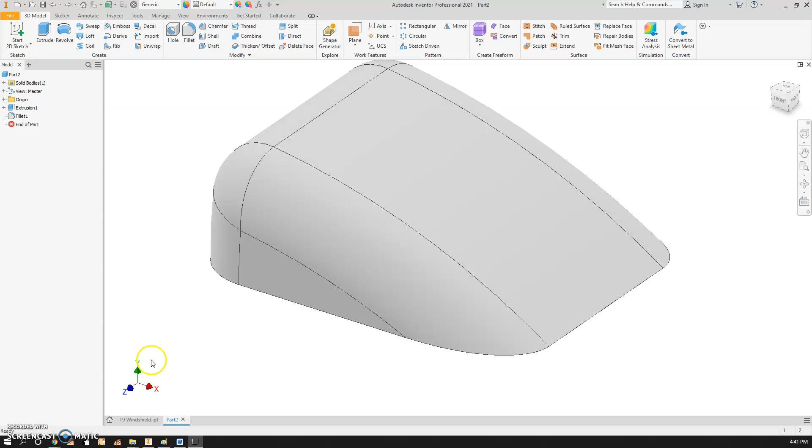Okay, part 2 of 2 or 3 or more. We need to shell this out. Then we need to add this bottom section, shell it out after filleting the corners here, add these little pegs here so it fits into the vehicle.

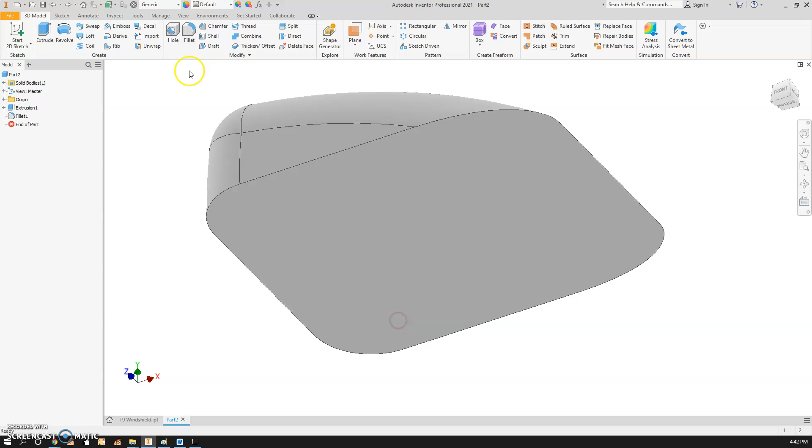So I'm going to hold shift and middle mouse, flip it over, and hit the shell button, which sometimes acts up like it just did, so I had to start over, and I said some certain words that I won't repeat here. Click on the bottom. This is supposed to be 0.07 according to our drawings. So that's what that looks like.

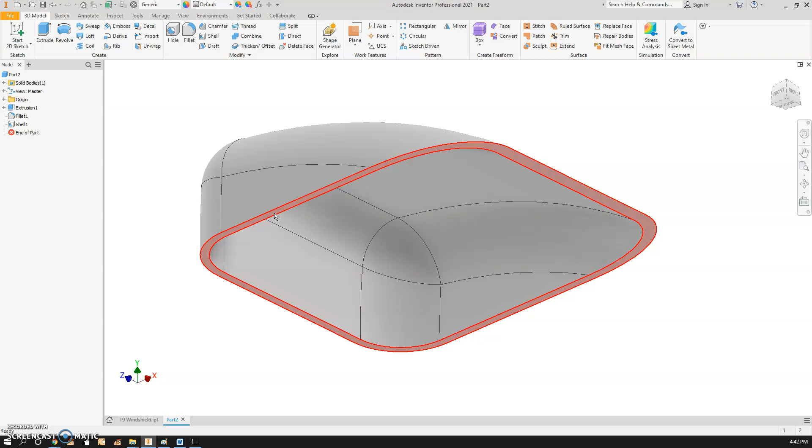Now I want to draw that part that sticks out. I could do it in 2 extrusions, both starting from this plane, go up into it, and then down. But I'm going to do it in 1 because that's better. So I'm going to use a plane, offset from this plane. It says it's 0.67 down.

I'm going to draw my sketch down here. I'm going to orient it just like it is in my drawings, which I have it right now. And I'm going to use the same numbers that they use, so I don't have to do any math.

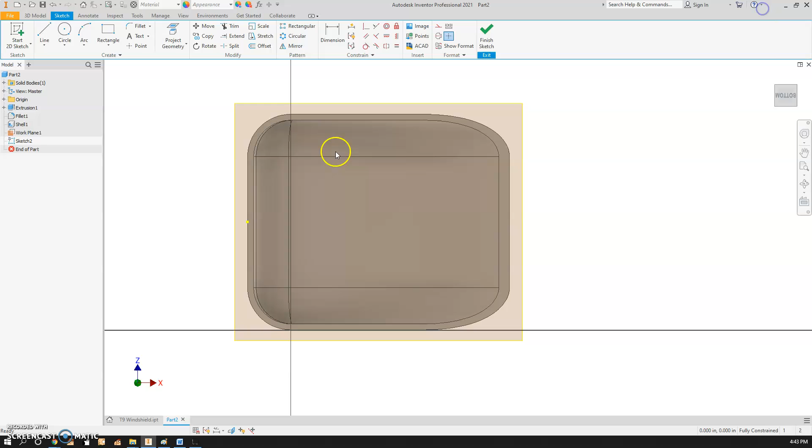So I'm going to draw a rectangle. I'm going to try to avoid any ant trails, any clicking on anything. I'm going to draw a rectangle like this. And I'm going to start dimensioning it.

This from the front is 2.22. This to the front of the windshield is... wait, this is the back of the windshield. That's the front of the windshield. 0.68.

This to here, this is all datum dimensioned. The bottom and right, 0.29. And then this side, hopefully making it halfway, even though going only to the hundredths on their drawings doesn't help.

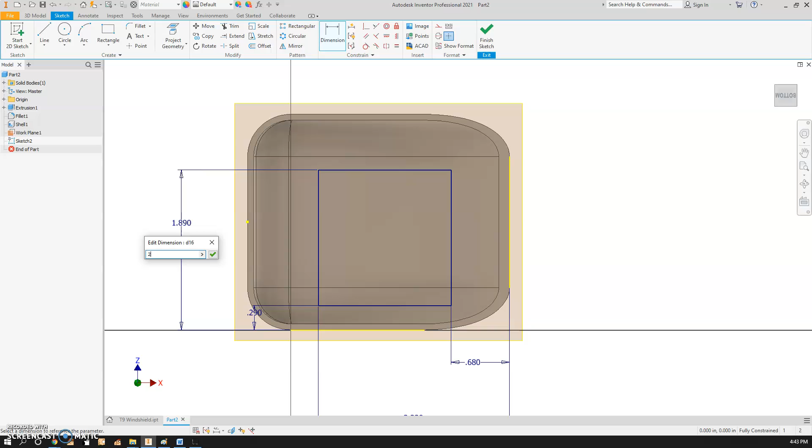2.26. Looks pretty good. Now theoretically I can fillet these in 3D instead of right now, but you could do it these 0.15 radii on these corners right now. But I'm going to do it 3D because that's usually easier to change.

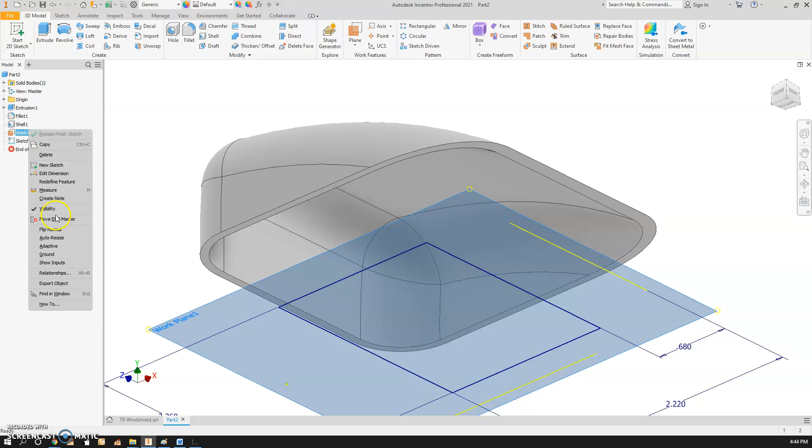So first of all, I'll come over here to my work plane and say, I can click on it as well, and say visibility off. I'm going to hit extrude, change the direction, and then I'm going to use this button right here, to next. It'll find something. When it runs into something, it'll stop.

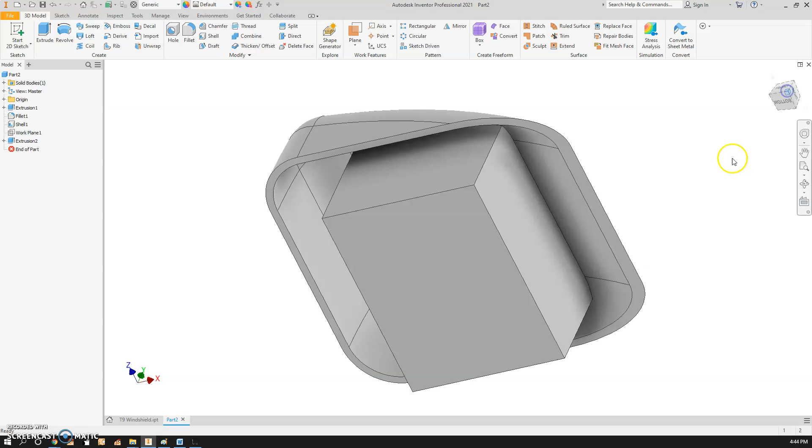Now we've got to make sure that we fillet these before we shell it, or we'll just shell right through our fillet, or the fillets will cut right into the shell. So I'm going to select these 4 corners. Mine's already set at 0.15 because I did this before.

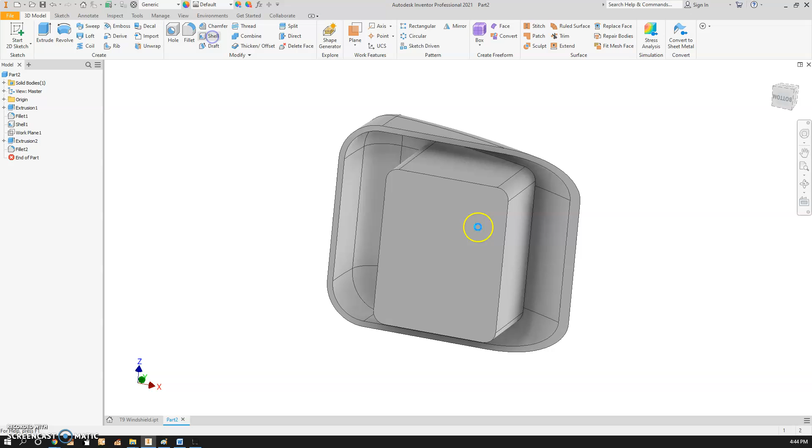Okay, now I can shell it. Hopefully. 0.05. And there we have that. So the only thing left to do, 0.05 was got from this drawing right here.

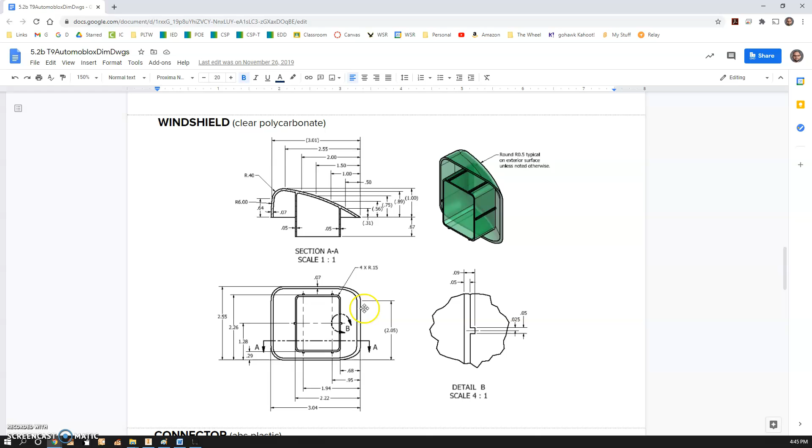The only thing left to do is to do these little pegs here. And I will do that in another video.